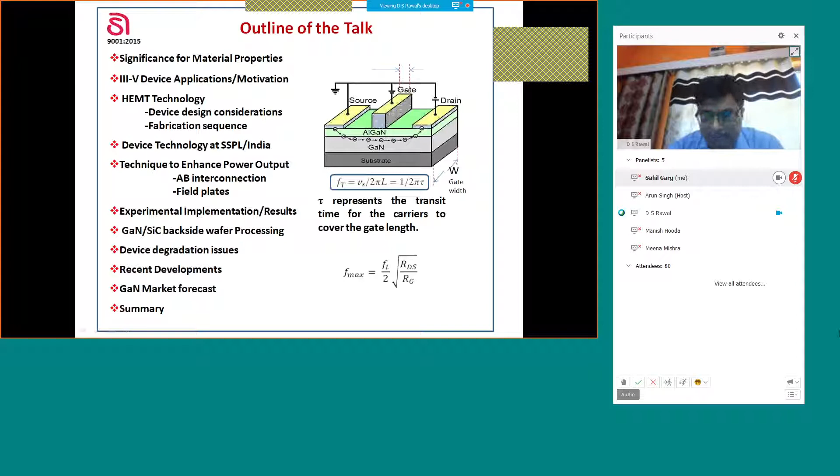If you consider semiconductors, silicon is the most important semiconductor of the 20th century. But there are still many things which cannot be achieved by silicon, like light emitting diodes, IR detectors, ultraviolet detectors, and very high speed electronics. High frequency or high speed performance is based on certain electronic transport properties which are not suitable in silicon for high frequency performance. Similarly, high temperature electronics or cryogenic electronics. So all these important application aspects are possible because of compound semiconductors.

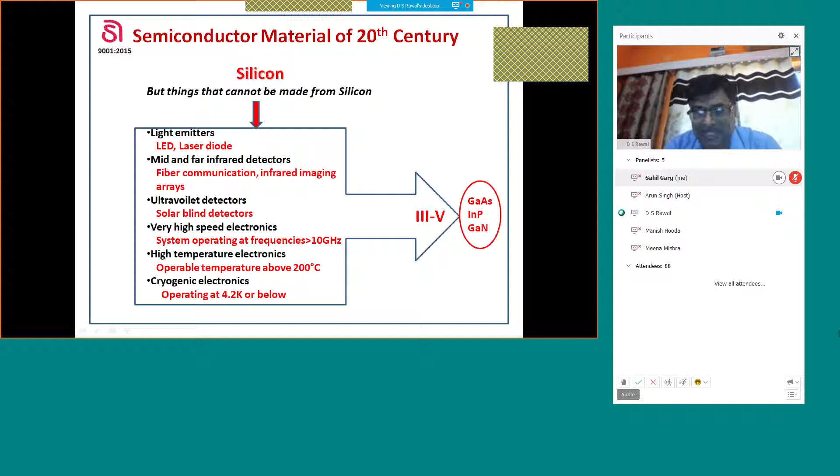The most widely used compound semiconductors are gallium arsenide, indium phosphide, and gallium nitride. Depending on the requirement of power and frequency performance, the particular semiconductor is chosen and worked upon. These days, because of very high frequency and high power requirements in various applications, gallium nitride is taking over most of the strategic and critical applications.

If you consider the three generations of semiconductors mainly based on silicon, gallium arsenide, and gallium nitride, you can see that gallium nitride wins over all three generations because of the obvious better material properties. You can see that the band gap is 3.4 electron volts, which gives flexibility of applying very high voltages, since high electric field strength is there.

This is the only wide bandgap semiconductor material system which exists in heterostructure with a two-dimensional electron gas in the quantum well, with a very high sheet carrier density, which gives us very high current. Then the other very important parameter for high frequency performance is the saturation velocity, which is very high. And another important parameter is mobility.

On the first day, Professor Dipankar Saha categorically mentioned that high frequency performance is mainly because of the high saturation velocity. Normally people give a lot of value to high mobility. High mobility is important, but it helps us in reducing excess resistances and increasing current density. So although high mobility is very important, for high frequency, saturation velocity is more important. But mobility reduces excess resistances, source resistance, drain resistance, and in a way also enhances frequency performance.

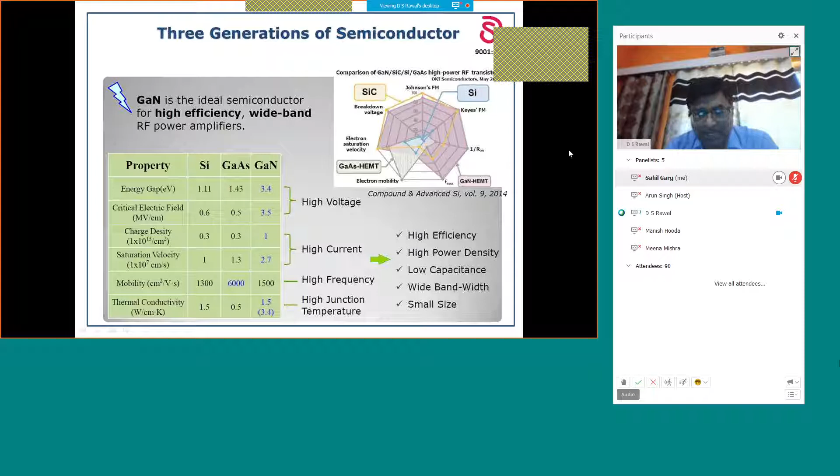I'll not be discussing this in detail, just to tell you that the best frequency performance is still possible using indium phosphide HEMTs, and the cutoff frequencies, or the maximum frequency reported, Fmax, is of the order of terahertz. Whereas if we need high power at high frequency, then the gallium nitride HEMT is the best candidate.

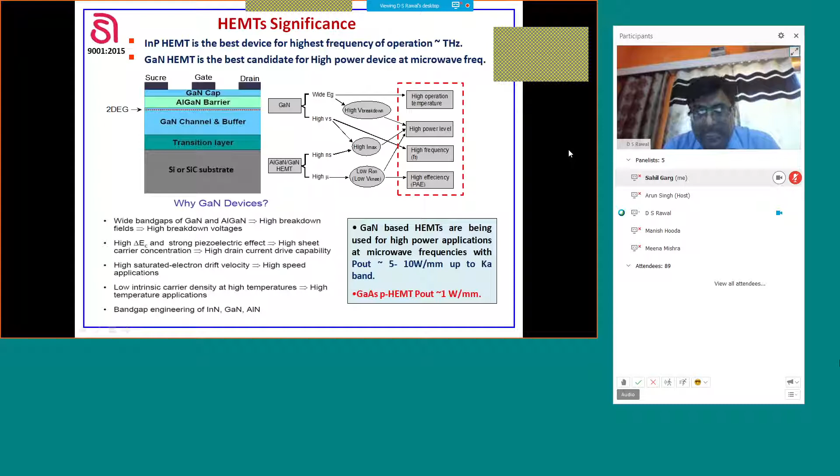For comparison, gallium nitride HEMTs give power density of the order of 5 to 10 watts per mm up to Ka-band, whereas in gallium arsenide pHEMT or indium phosphide pHEMT, the power density is restricted to 1 watt per mm. So when we are talking of systems with very high power density, one has to go to gallium nitride based systems. And since the density is very high, we get a lot of advantages in size and weight considerations, which are very important for airborne applications.

Another important aspect of this gallium nitride technology is that major microwave applications can be divided into two categories: one is below 3 gigahertz and above 3 gigahertz. Below 3 gigahertz, many competing technologies are there: silicon carbide MESFET, silicon, gallium arsenide HBT, gallium arsenide HEMT. But above 3 gigahertz, very limited technologies are meeting the requirement.

Above all, the beauty of gallium nitride technology is that it is covering the entire frequency spectrum, and most suitable for high power, high frequency applications.

Another important aspect is, if you consider a transmit-receive module, which is the heart of any communication system, three important amplifier or MMIC circuits can be replaced by a single MMIC circuit, called TR chip. This power amplifier, low noise amplifier, and switch, if we talk about gallium arsenide technology, can be separate chips using a lot of space, and there are losses of integration, and it requires a limiter also, which hampers the low noise performance.

So all these 3 or 4 chips can be replaced by just a single chip because of the availability of gallium nitride based MMICs. This gives us a lot of size, weight, and power performance enhancement, and is suitable for all airborne radar systems used for strategic applications.

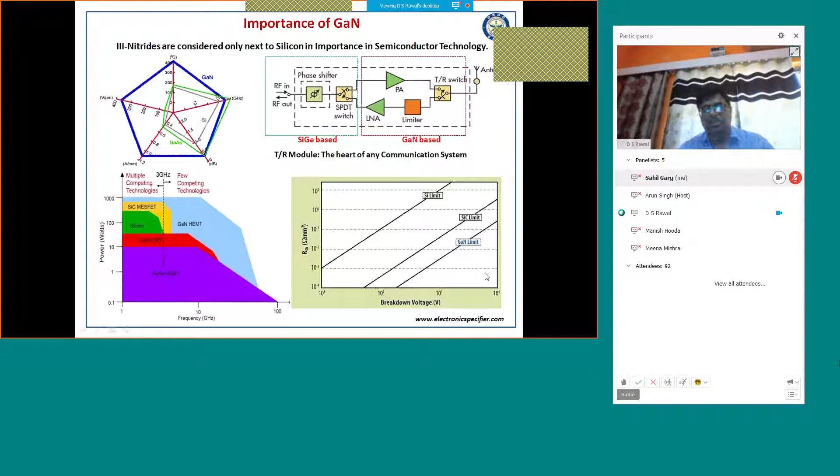The demand from future warfare systems is mainly based on SWaP-C. SWaP-C means size, weight, and power. We want smaller sizes, smaller weight, and high power. And C is again cost. Cost becomes very important when we are competing with commercial applications.

If you see the GaN material properties or GaN based system devices, they are most suitable for these kinds of applications. Major applications where these devices are being used are AESA radar, which is a phased array radar, then electronic warfare systems, communication links, satellite communication, then 5G, 6G are coming in a big way, and they are big users of this gallium nitride technology. Then software defined radio, anti-drone radars, all these are mainly using gallium nitride based systems because of obvious advantages of size, weight, power.

You can see that this phased array radar has no antenna mechanical movement. We can steer the beam by just changing the phase using phase shifters, and the beam is scanned. Because of the high power density, these radars can be mounted in fighter aircraft itself, and all fighter aircraft like Tejas or Rafale are using these phased array radars.

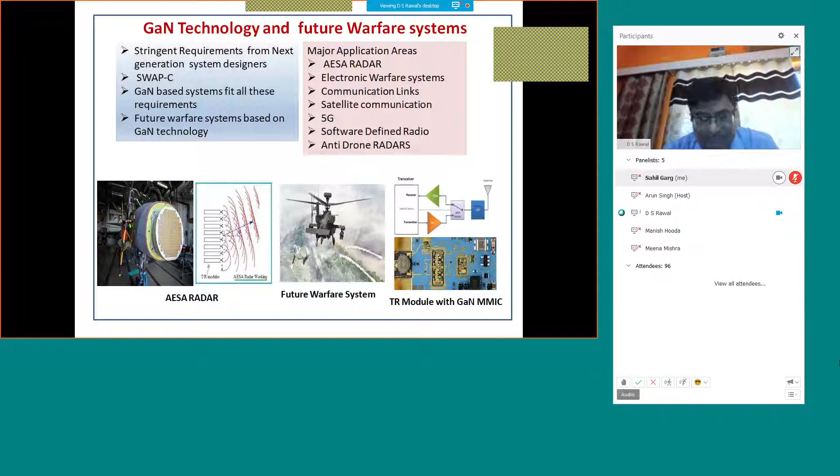If you see the GaN R&D initiatives in India, considering the importance, many academic institutes are working on this technology, mainly on device development. For HEMT technology development, IISc Bangalore, IIT Kanpur, IIT Delhi, IIT Madras, TIFR, Delhi University, PEC Chandigarh, SCL/ISRO, and IIT Roorkee are working, but their main area of work is mainly the HEMT device.

At SSPL, we are working on MMIC technology development. MMIC is microwave monolithic integrated circuits. So basically, the majority of usable products are in the form of integrated circuits - MMICs in the form of low noise amplifier, power amplifier, or switch.

On the first day, Professor Dipankar Saha also mentioned about MMICs, and they are working on the gate length of 0.1 micron. At SSPL, presently we are working on 3 frequency bands, that is C band, X band, and KU band, and the gate lengths we are working on mainly are 0.7 micron, 0.25 micron, and 0.15 micron.

The majority of products which will be used are based on MMIC technology. If you look at international standards, in 2019 only this 0.15 micron technology was available for commercial use, but even that is limited depending on your end user certificate and other factors, because this technology will not be available for strategic system development. So we have to have our own technology for self-reliance.

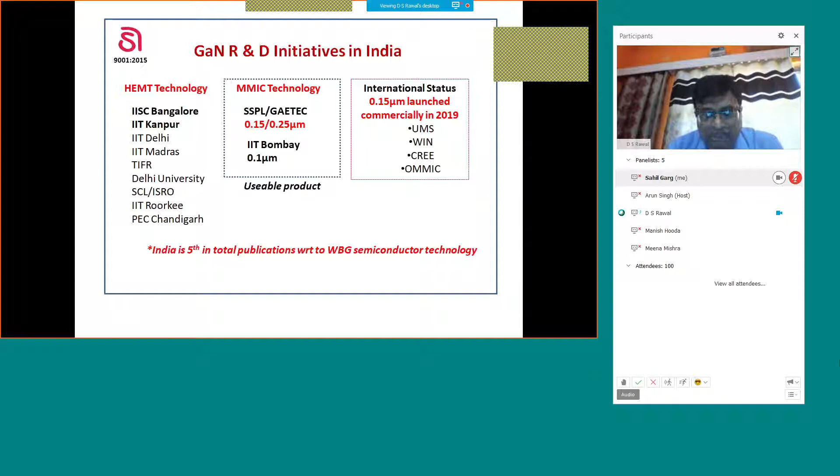Because of this, the government is now also seriously thinking of setting up a GaN fab for development of these MMICs, and a lot of work is going on. So we hope to get our own MMIC technology in the near future.

Looking at GaN technology at SSPL, basically for any GaN device technology, you have to have 4 big building blocks: your own process technology, material development, then design and modeling, and measurement.

If you look at any technology advancement, say silicon, the majority of technology advancement has taken place because of process innovations. But looking at compound semiconductor technology, most of the technological advancements have taken place because of material innovation. So for these RF applications, material is one of the very important things, and therefore process technology as well as material development become very important if you want to have your indigenous technology. Device, design, modeling, and measurement capability are also important.

At SSPL, we have mainly worked on RF electronics, and that too for radar applications for phased array radar and electronic warfare systems.

We have our own material growth facility based on MOCVD and MBE, and we have our own device fabrication sequence with the basic unit processes of contact formation, MESA isolation, gate formation, and passivation, as discussed in detail by Professor Dipankar Saha.

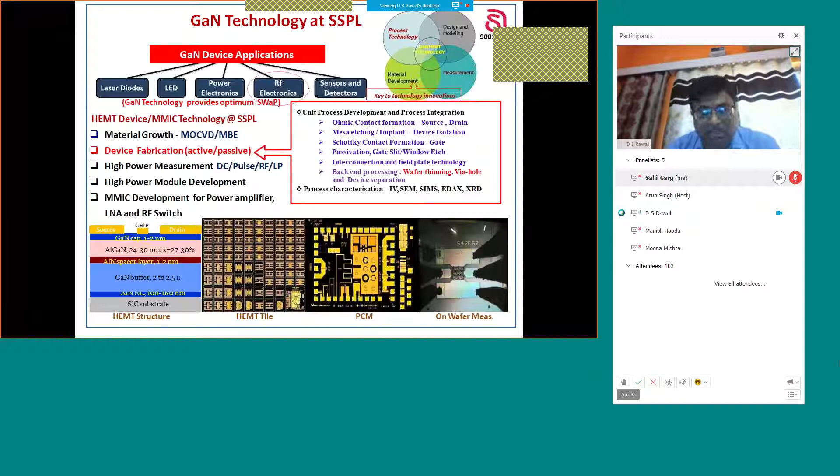And once you have your own active device, you have to have your own passive device with their models, and then these models are used for designing MMICs, which are the actual products used in these defense applications which I have just discussed.

So the first important thing is your own material. The HEMT structure is very important, and it is a heterostructure between two different band gap materials. One is GaN, another is AlGaN, and the 2DEG density, as discussed by Professor Dipankar, depends on the thickness of your barrier layer, that is the wide band gap material, aluminum gallium nitride.

Depending on the requirement, we have to fix the thickness of our barrier layer, and aluminum concentration also decides the band gap, which then gives the conduction band discontinuity, very important for confinement of the carriers. So to have high sheet carrier density in the quantum well, we have to have high thickness as well as high aluminum concentration.

But high thickness or high aluminum concentration have other consequences, so we have to have a compromise. We just cannot increase thickness or aluminum concentration, because the growth issues become difficult, and we have to have a very good interface quality, and dislocation density should be very low.

Then good 2DEG characteristics mean very high sheet carrier density and very high mobility. Since these are very strained layers, there are chances that the wafer may curve or get a bow. This bow should be minimum, because when we fabricate these devices, we are using contact lithography, so we need a perfect contact with the mask.

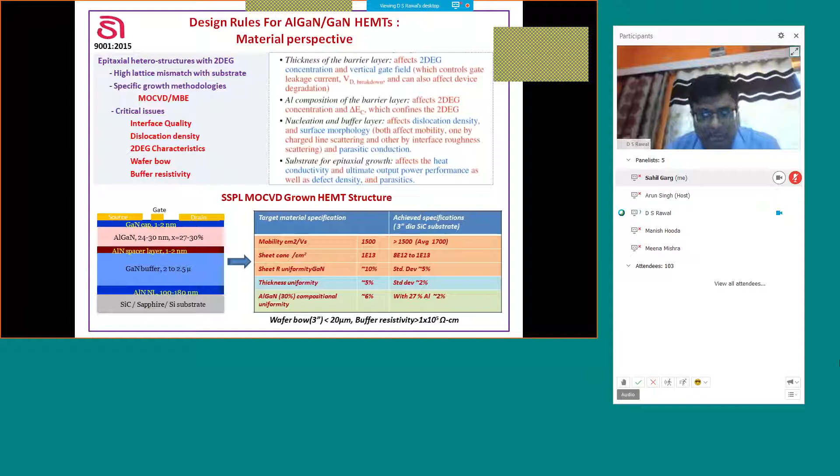continuous high mobility of more than 2000 centimeter square per volt per second with an NS of 1 to 1.5 E13. And the bow of the wafers of 3-inch size, we have controlled to less than 20 micron, which is as good as available in the commercial market.

The present status of growth is that we presently have a 3-inch growth technology, and our indigenous material has delivered devices with 4.5 watt per mm at 28 volt up to C band, and the plan is to upgrade now the wafer growth to 4-inch. Presently we are using buffer resistivity with carbon doping or dislocation by introducing dislocations, but the best results obtained or reported are with iron doping buffer.

So we are now in the process of installing one new MOCVD with this iron dope capability. The system has already arrived in SSPL and is under installation, and we hope to get, by end of this year, our own HEMT structures with the iron dope buffer.

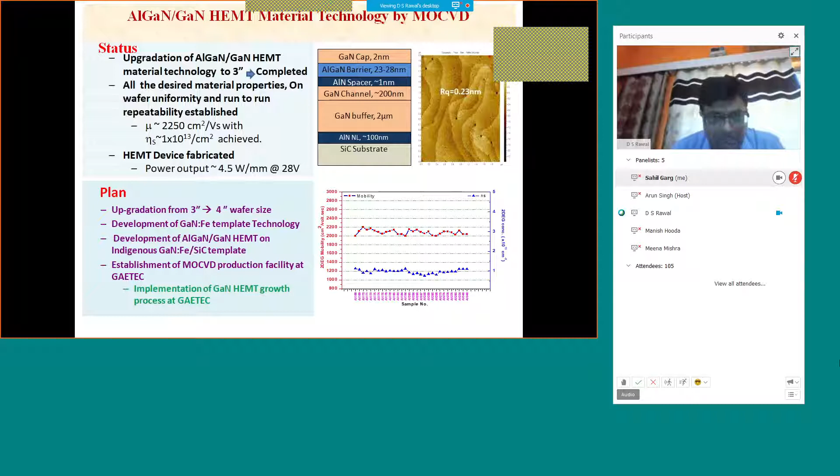Considering device considerations, the HEMT basic device design depends on your requirement of frequency and power density. We cannot take random parameters or geometrical parameters. Unit gate width is a function of power gain, so if I want to have a very high power gain at a high frequency, I have to have a controlled size of the device based on HFSS simulation.

You can see that if my size increases enormously, more than lambda by 16, then distributive effects come into play, and a lot of parasitics come in, and my performance will be degraded. So depending on the frequency requirement, we have to decide the design of our device, which includes unit gate width, gate length, gate to gate spacing, number of gates. We just cannot keep on increasing the number of these parameters just to have best performance.

That will not come because it is a function of the frequency. You can see that this graph tells you that with frequency, the power gain is reducing for a particular unit gate width. So for X band, I cannot have unit gate width more than 125 or 100 micron. But for my HEMT, I can have 300 or 500 micron at S band, because power gain reduction is not more than 2 dB at S band for that unit gate width.

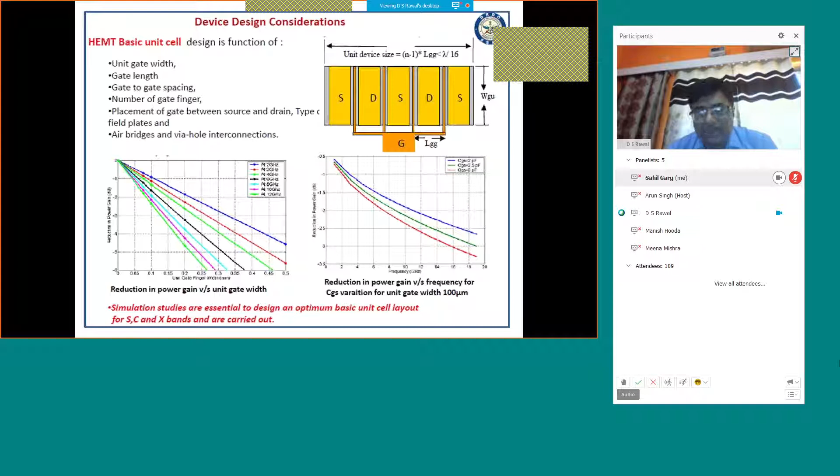Since very high current densities are involved, a lot of heat is generated, so we have to control the channel temperature of these devices also. That channel temperature is a function of gate width, gate length, substrate thickness, and substrate thermal conductivity. This channel temperature governs the design of your cooling system or package once these devices are used in actual systems.

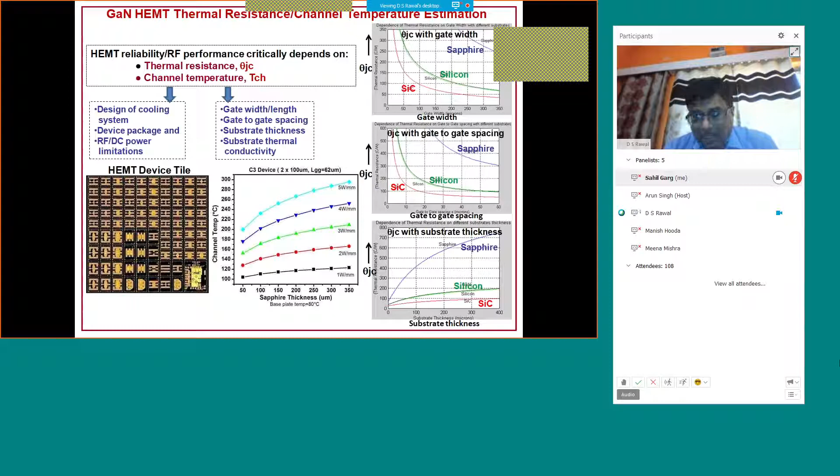This graph shows how the channel temperature varies with the kind of substrate. You can see channel temperature is minimum for the silicon carbide substrate because of its very high thermal conductivity. That is why silicon carbide substrate is most preferred for high power applications, because it can dissipate very high power at a very fast rate, and we can have high channel current devices delivering very high power densities.

At our place, we are basically working on two different processes. One is totally based on optical lithography, where my gate length is of the order of 0.7 micron, catering to C-band processes. The other process uses electron beam lithography, where my gate length is 0.3, 0.25, and 0.15 micron, for development of X band and KU band devices. The complete process is a 12 to 13 mask process with dry etching, metal deposition, gold electroplating, silicon nitride deposition for passivation, DC and RF testing, and backside processing.

Normally in backside processing, lapping is the technique used, but since a lot of strain is involved in my HEMT structure, and I don't have the flexibility to change that strain—because it decides the sheet carrier density and affects the current output of the device—I don't want to disturb the strain condition of the heterostructure. So grinding is the preferred technique to reduce the thickness once fabrication is complete on the front side of the wafer.

Since silicon carbide substrate is involved, once we completely fabricate the devices we need to separate them by cutting or dicing them. Special dicing techniques are used to separate these devices, because we have to dice the silicon carbide. All these processes are now available at our place, and we are regularly using them for the fabrication of devices up to X band.

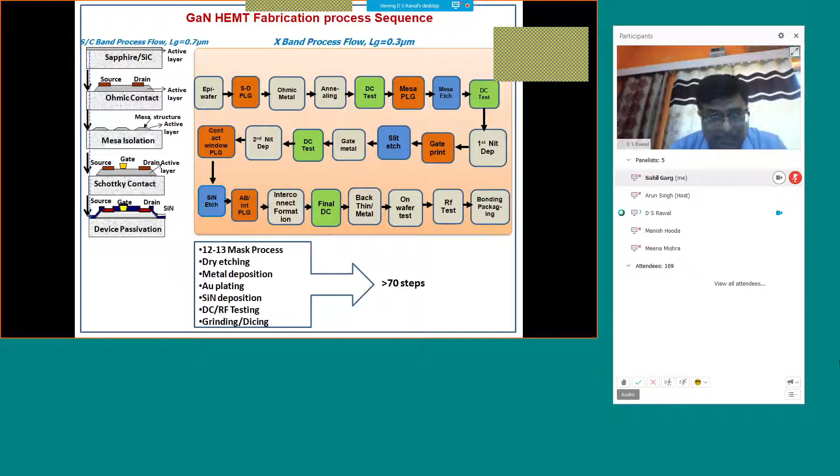I'll just briefly discuss FT analysis, because going to high frequency, it is considered that only reduction of gate length is sufficient, but reduction of gate length is not the sufficient condition to achieve the high frequency performance required for these strategic defense applications.

If you see, the cutoff frequency is normally based on this formula, and cutoff frequency is defined as the frequency at which the current gain is unity. It is mainly a function of gate source capacitance, source resistance, and drain resistance, but this cutoff frequency is not only a function of gate transit time, it is also a function of the parasitic capacitance or parasitic delay involved in transport of electrons from source to drain.

So mainly it is three components. One is called intrinsic delay, which is mainly reduced by reducing the gate length. Extrinsic delay is based on your gate architecture—how your gate geometry is, whether it is close to source or in the center of source and drain, or its shape, whether it's a mushroom gate or some other kind. Then parasitic delay depends on how good your contact resistances are; we need to have minimum source resistance or drain resistance.

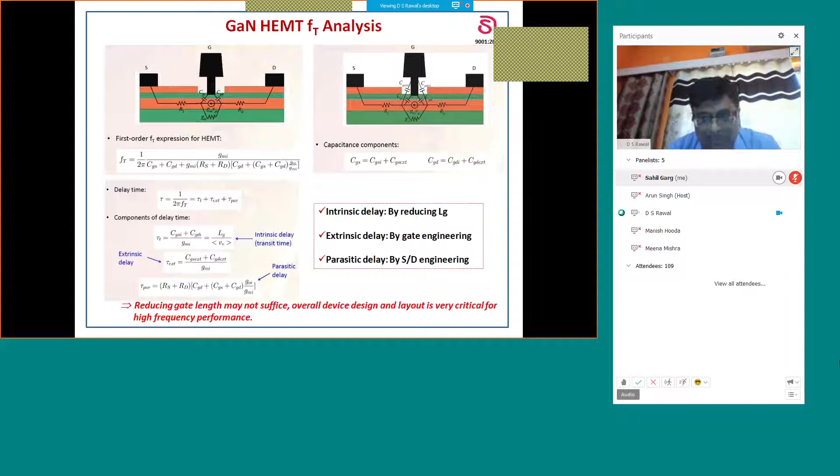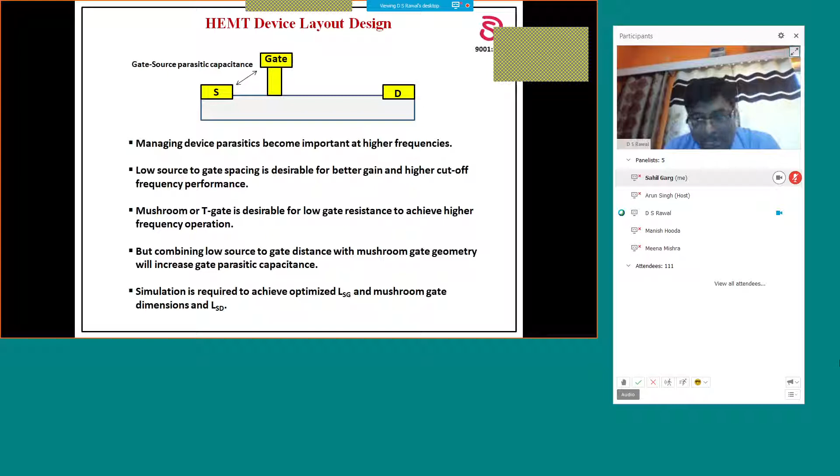Considering HEMT device layout design, we need to manage the parasitics at high frequencies. Low source-gate spacing is desirable for higher cutoff frequency. As we go higher in frequency, we need to reduce gate length as well as gate-to-source spacing. Mushroom or T-gate is desirable because it gives low gate resistance with high cutoff frequency. Simulation is very essential to have an optimized layout of the device before going for actual device development.

Source and drain are ohmic contacts, and gate is a Schottky contact, and these have already been discussed in great detail on the first day by Professor Dipankar Shah. I will not dwell much on these, but we also have an ohmic contact based on titanium aluminum nickel gold, and this is suitable for up to X band applications because the RC, or figure of merit, is of the order of 0.4 to 0.5 ohm mm.

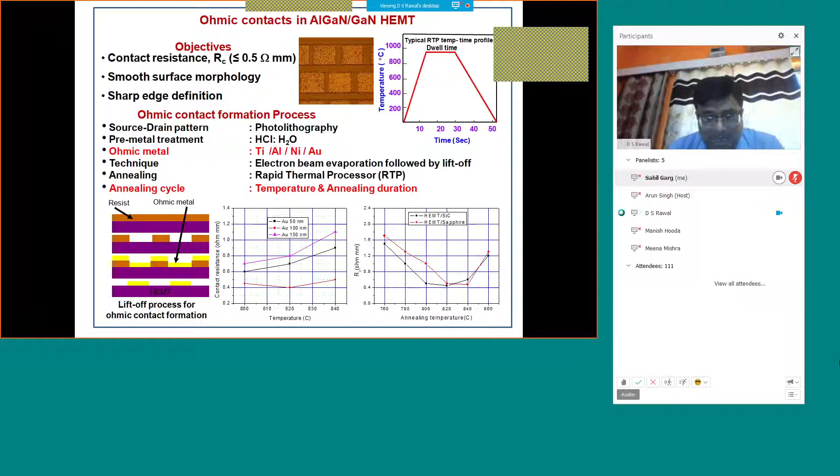But when we go to KU band frequencies, we need to reduce these RC contact resistances of source and drain, and the required order is less than 0.2 ohm mm.

This ohmic contact technology is not only a function of the metal stack or the temperature, because it is a long process sequence which involves an RTP heating cycle, how good your photolithography process is, what residues are left, and how clean the surface is where you are putting the metal.

We use an oxygen plasma cleaning step of a particular duration, then argon bombardment to increase the nitrogen deficiency, and then pre-metal treatment to remove oxides if there are any. So it is basically a combination of different processes for a single source-drain ohmic contact formation, and ultimately it leads to improvement of the figure of merit.

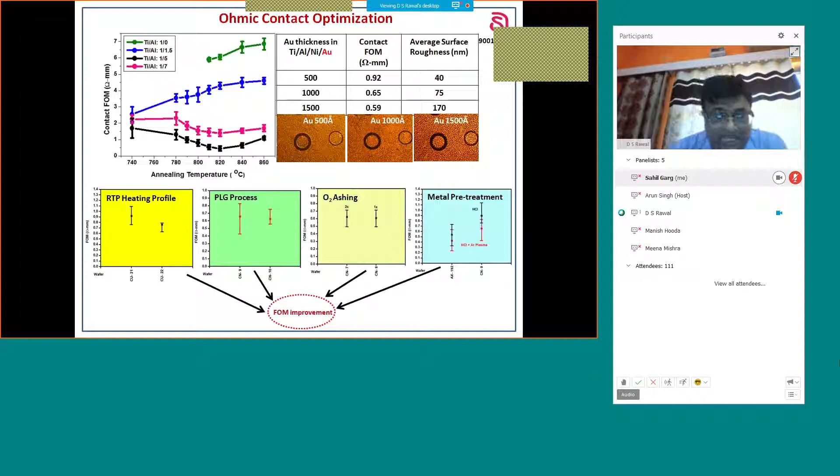Now we have a process based on gold, silicon, titanium, aluminum, nickel, gold, and we are achieving an FOM of the order of less than 0.2, suitable for KU band applications also.

At the same time, as discussed on the first day, other important parameters of the ohmic contact are smooth surface morphology and edge acuity, which are very important for going to smaller gate length devices. This new metal system gives us better surface morphology and better edge acuity, with RMS surface roughness of 80 angstrom, which is as good as reported anywhere in the world.

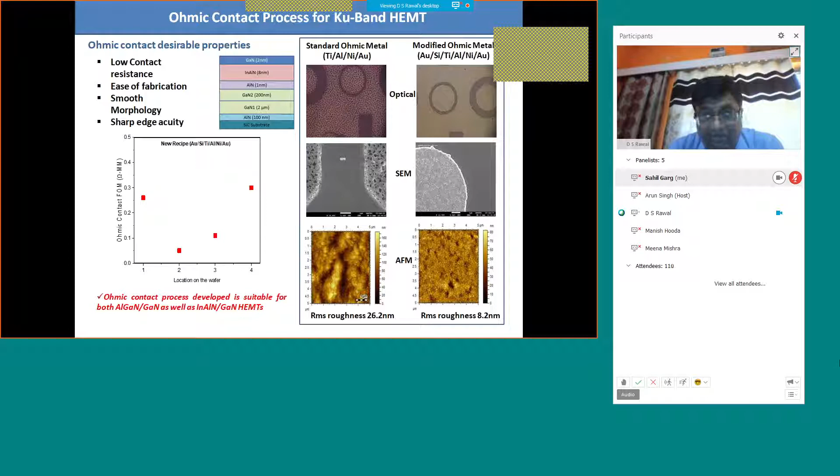And now we are implementing this ohmic process for fabrication of KU band devices.

Since all these devices are fabricated together on a single wafer, they have to be electrically isolated. Since gallium nitride involves very high bonding energy, no wet etching is possible. So the etching of unwanted material is done by dry etching, using chlorine-based reactive ion etching process.

You can see this is the cross section showing the active area, where these are called mesas, and actual HEMT structures are fabricated over these. So simultaneously I am fabricating several HEMT devices, and they have to be electrically isolated. So I am removing the conducting material in between, but in a controlled manner.

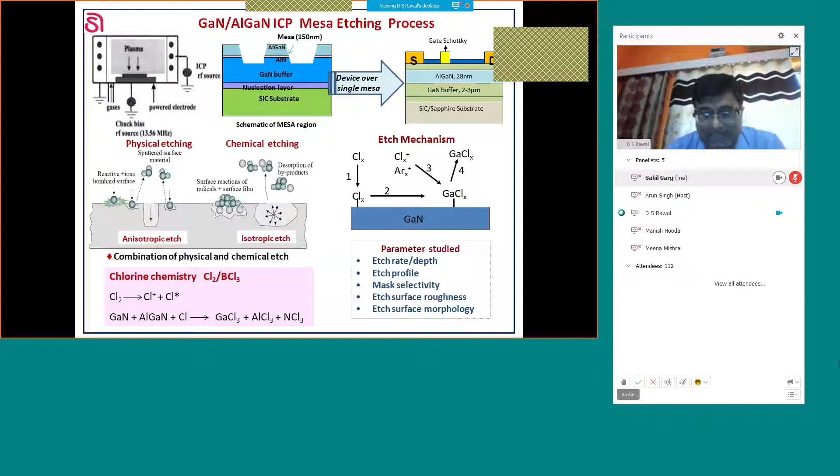This is done by chlorine-based plasma chemistry, and this process we have developed here, and we are now regularly using it for fabrication of devices.

You can see that this is the source, this is drain, and this is gate, and this gate pad is to be on the buffer, and this is the active region where my 2DEG is there. This cross section shows the actual mesa top where the device is fabricated, and this is the buffer where normally my passive component or gate pad is formed.

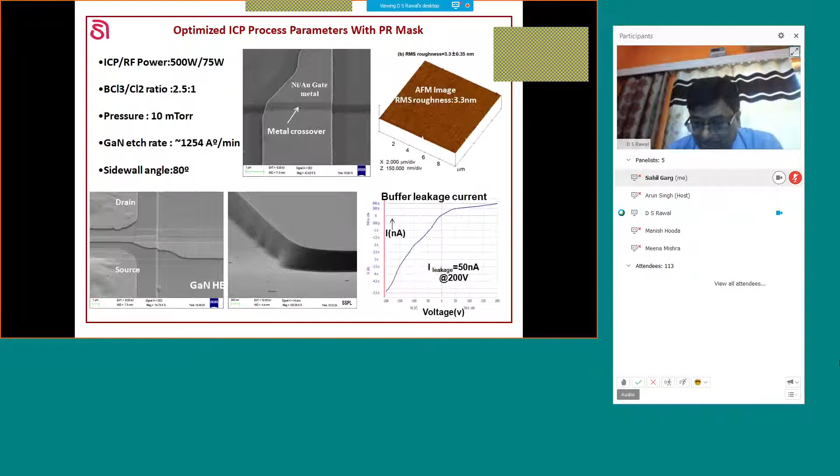This process is conventionally used for mesa isolation, but these days the preferred process is ion implantation because it gives flexibility of a planar process. This planar process is preferred for high frequency applications beyond X band or KU band.

Where you don't want implantation to take place, we cover that area with a mask using thick photoresist, and you have to choose your parameters such that after implantation you are able to remove that photoresist easily. Otherwise this becomes very hard because of high heat generation, and the process becomes very difficult.

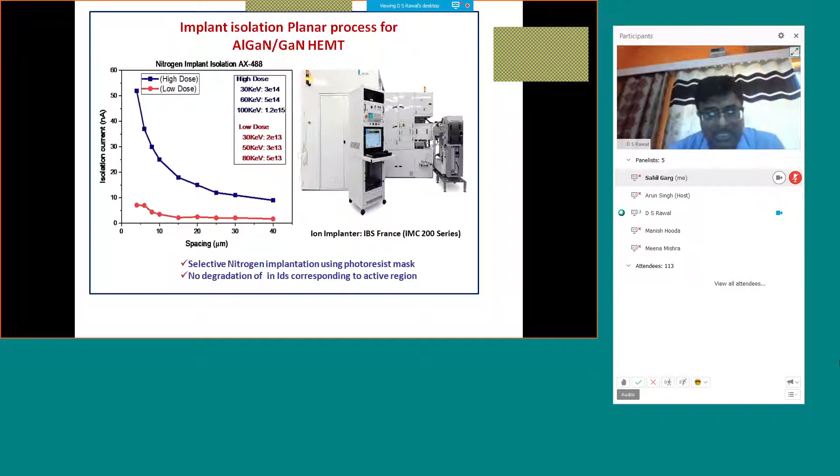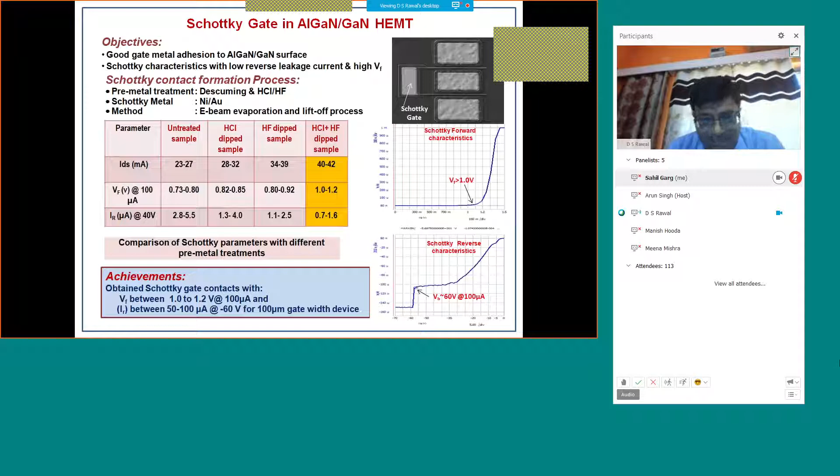So we have this process, and we have our own ion implanter at SSPL, and we are using this planar process for MESA isolation. We are using nickel Schottky gate, and the barrier height is of the order of 0.9 electron volt, with breakdown voltage of more than 150 volts.

Another important process, as discussed by Professor Dipankar Saha, is device passivation, because this gallium nitride material is a very, very defective material. So traps are there. These traps normally don't participate when we are doing DC characterization, but they come into picture during RF performance. So this trap characterization is normally carried out by pulse IV.

So you can see that this is my DC characteristic, but once I am using a pulse IV measurement, because of the presence of these traps, and these traps are trapping my carrier electrons, current reduces drastically in pulse IV or RF mode of operation. So we will not ultimately get the power.

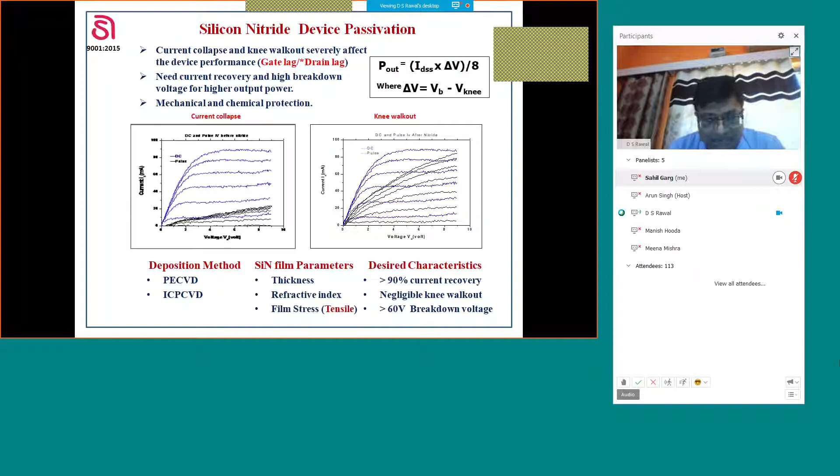So these traps are to be passivated by this silicon nitride device passivation, and this is normally done by plasma enhanced chemical vapor deposition or inductively coupled plasma chemical vapor deposition process, and these traps are passivated.

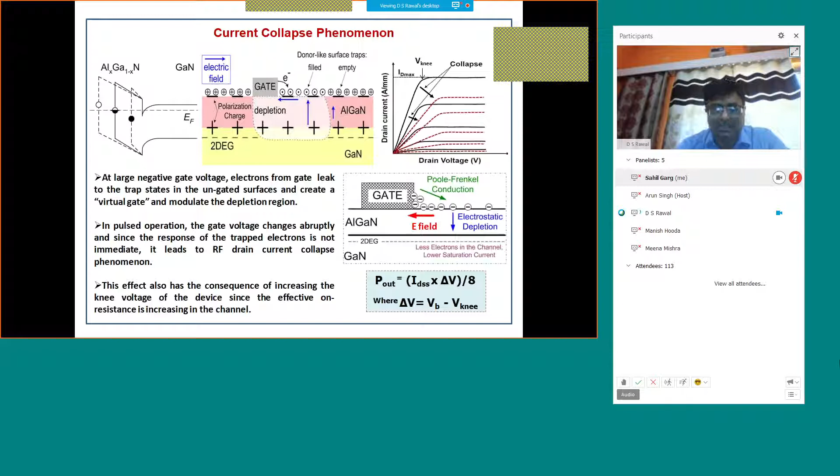And you can see that this is a virtual gate formation process, which I think is explained by Professor Dipankar Saha, so I will not go into detail, but the basic idea is to maintain the charge state of the aluminum gallium nitride layer's initial charge state, because during reverse bias, when we apply negative voltage at the gate, electrons leak through the gate and basically compensate the positive charge at the surface, and hence deplete the 2DEG.

Which ultimately results in reduction in the current or two-dimensional electron density, which reduces current and increases resistance, and this results in current collapse, which is basically reduction in current and increase in resistance, and ultimately the power performance is degraded. So this is normally taken care of by the passivation process, and this is how we have optimized our passivation process.

And this silicon nitride passivation is normally used in tensile strain, so that this tensile strain adds up in the piezoelectric polarization and increases the 2DEG to some extent. Therefore, after passivation, some increase in current and GM of the device performance is normally seen.

But there is a slight reduction in breakdown voltage also. So you have to have optimization of these parameters to have good current recovery, or minimum current collapse, with high breakdown voltage and good current density.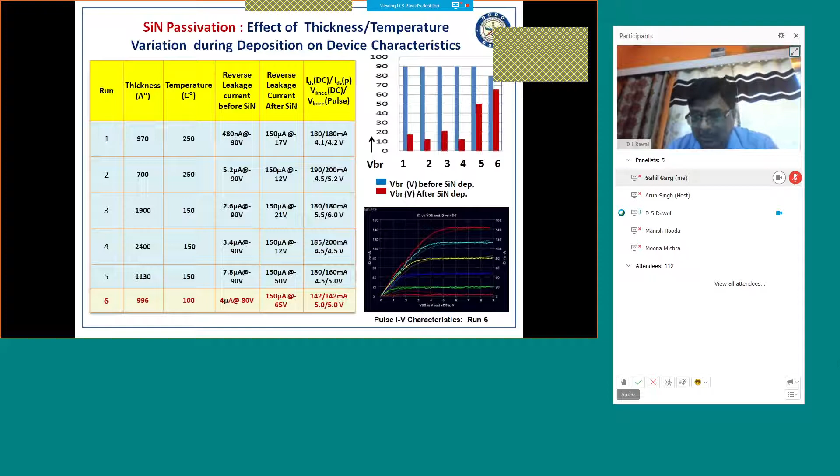And these traps are basically because of your defects. They may be point defects, they may be aluminum gallium nitride related defects, or they may be surface defects or surface traps. So depending on their location, they are affecting my device performance.

So if these traps are at the surface, then they result in the gate lag. That is called gate lag, because my gate voltage is not able to introduce the fast variation in my source drain current. So these are mainly taken care of by passivation.

But if these traps are present under the gate or in the bulk material, then they cannot be taken care of by this passivation. Then they can only be improved by improved growth techniques.

And one quick way of studying the presence of these traps is the CV analysis. So when we do capacitance voltage analysis at variable frequencies, you can see the CV curve behavior depends on these traps, because they respond to a particular frequency because of their fixed time constant.

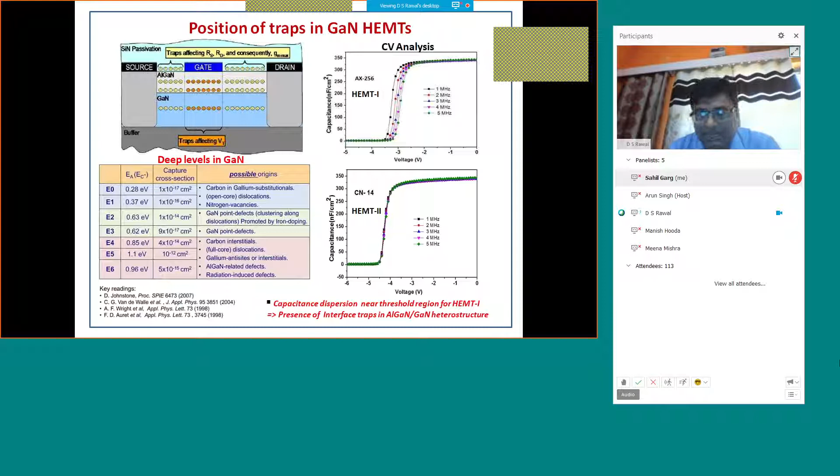And another important technology, because we have to have very high current handling devices, is that in these devices we have multiple fingers, so all those fingers need to be connected with low parasitic interconnection.

Air bridge is one of the low parasitic interconnections. At the same time, it gives you very good dimensional control with thick metal thickness that increases its current handling capability. So we have better dimensional control with high current handling capability and low parasitics.

So you can see that this is basically an air bridge. The metal is lifted from here and it is now in air, connecting this. This metal crossover is mainly separated by air, and air is the dielectric which has the lowest dielectric constant, so the metal overlay parasitic capacitance is minimum for this kind of interconnection.

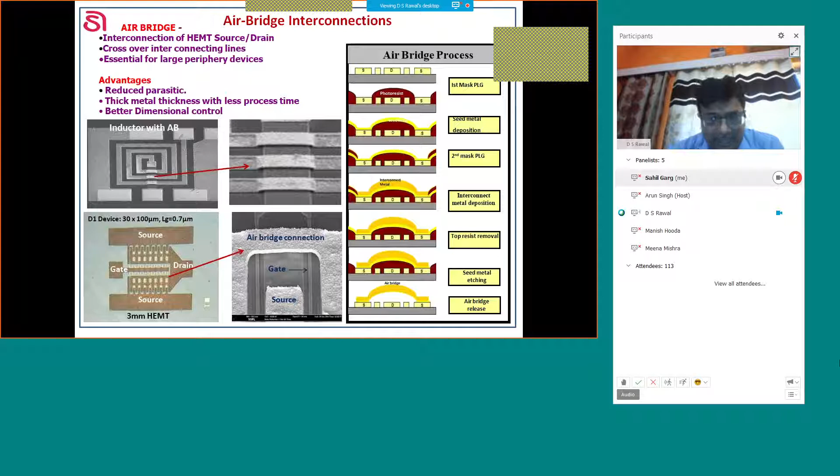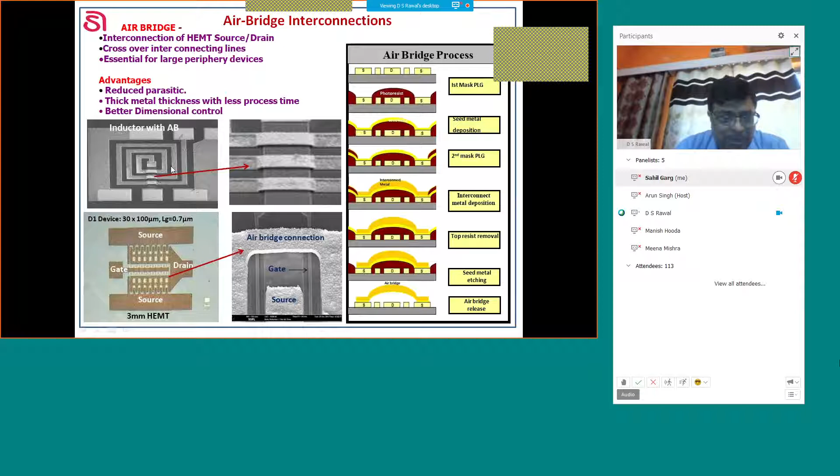This is mainly used for connecting multi-finger gates, multi-finger sources, or multi-finger drains in large periphery devices, or in spiral inductors, where this metal crossover parasitic becomes important at high frequencies.

Another important technology is on-wafer characterization. I will not dwell much on this; Dr. Meena will be discussing it, but it's very important because in RF technology development you need quick feedback. You need quick RF measurements at wafer level to improve upon your process. Otherwise, in RF technology, normally these devices are packaged and bonded before measurement, and that takes a lot of time. So CPW measurement capability is one of the very important aspects for quick technology development, which will be discussed in great detail by Dr. Meena in the next talk.

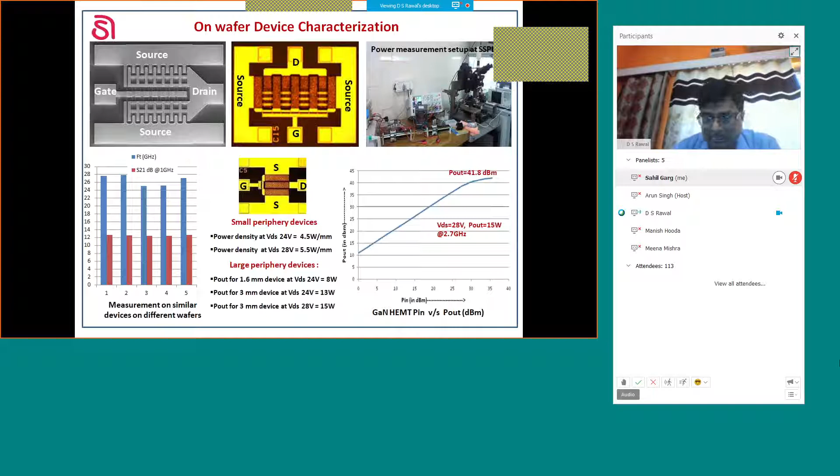Another important aspect I would like to discuss from our own experience is that just saying my material is good, measuring only sheet carrier density and mobility is not enough, because until the complete device is fabricated and characterized for RF performance, I cannot say that my material is good.

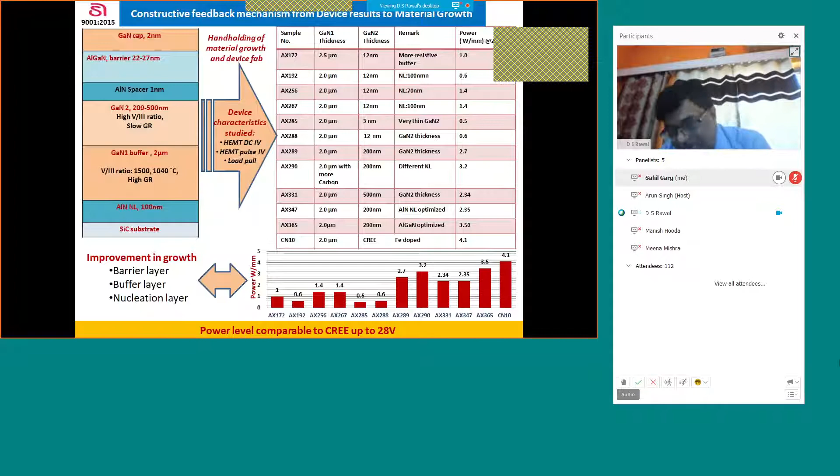Initially we worked with this kind of practice, but a lot of experimentation was carried out with not so good results. But once we started having discussions with our material growth team, there was continuous interaction between fabrication and growth teams, and based on the fabrication results we improved each individual layer, be it a barrier layer, a buffer layer, or a nucleation layer. Today we can say we are almost matching the commercial wafer power output of the order of 4 to 5 watts per mm, mainly because of the hand-holding between growth people and device people. So it's very important to work in a synergetic environment where both are discussing with constructive feedback for the improvement of the device. If you work in isolation, either material people or device people, it is very difficult to achieve the desired results.

Another important technology in use for these devices is field plate technology, because we operate these devices at very high source-drain voltages of the order of 28, 50, or 65 volts. These devices need very high breakdown voltage, and the thumb rule is that the breakdown voltage should be 3 times the operating voltage. So if I want to operate my device at 50 volts, it should have a breakdown voltage of more than 150 volts. Normally when we fabricate the device, the breakdown voltage between gate and drain depends on the electric field between gate and drain.

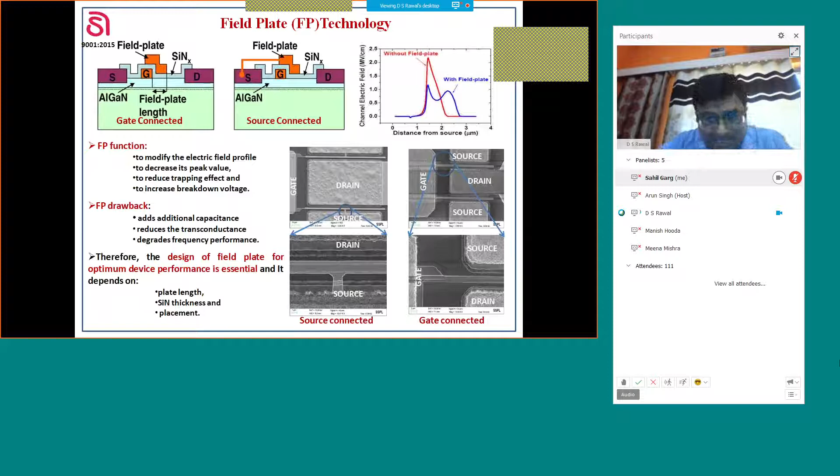This field plate reduces the peak of the electric field by redistributing the electric field in the gate and drain region. Atlas simulation is used for designing these field plates. As explained by Professor Dipankar, these are extensions of the gate fingers, and for our own devices we have designed these field plates as multi-finger field plates. You can connect this field plate to either the source or the gate.

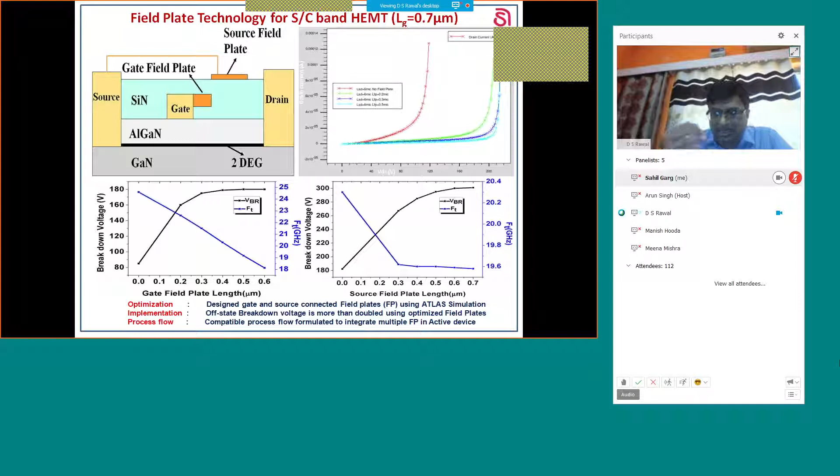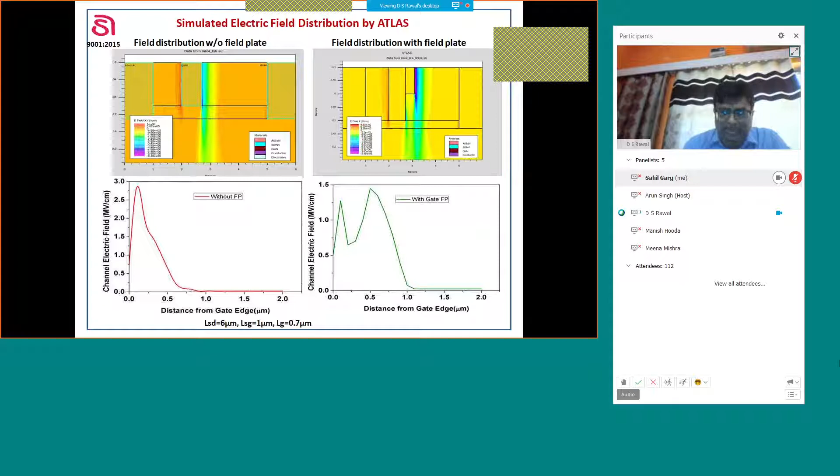Depending on the requirement, the device configuration is used. You can see that in a conventional device with no field plate, the electric field between gate and drain is of the order of 3 megavolts per centimeter. But when we put a gate field plate, the electric field peak reduces to 1.5, and if I use both field plates, gate connected as well as source connected, the field further reduces.

This enhances my breakdown voltage, and this is the actual measured result. Without a field plate, the breakdown voltage of a device is around 50 volts, but with the gate-connected field plate, it is around 90 to 100 volts, and with both gate-connected and source-connected field plates, it is more than 150 volts.

And now I am able to operate my device at 50 volt VDS, and the power output is of the order of 10 watt per mm. Although before, without field plate, it was 5 watt per mm. So that is how device capabilities are enhanced by using field plates or by reducing the peak of electric field.

Between gate and drain. But there is a disadvantage of these field plates also, because we are connecting them with the gate finger. There is an adverse effect of this, because it is increasing the gate capacitance. So your frequency performance is getting affected.

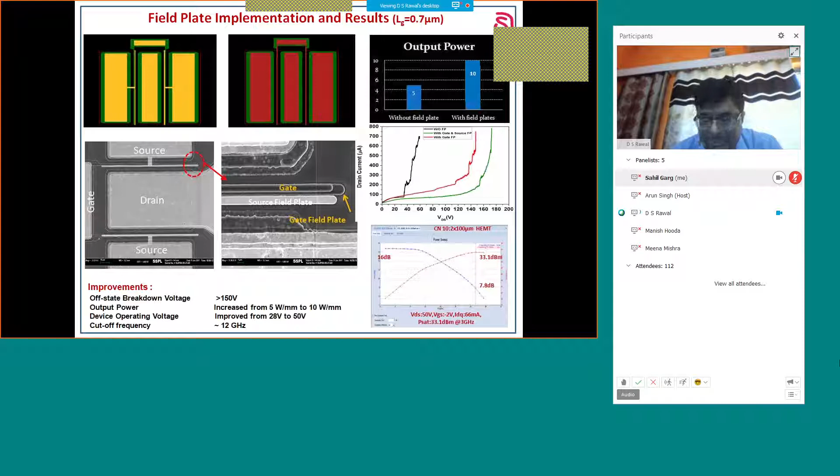So another important advantage of field plate is that it reduces the leakage current, which is again very important aspect for these gallium nitride devices. And lower leakages provide the higher gain.

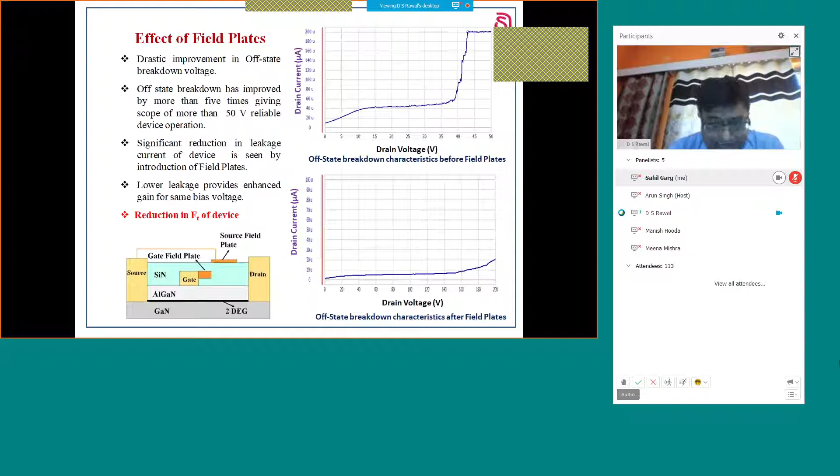But the disadvantage, as I told you, is that it increases the gate source capacitance, which reduces my cutoff frequency. So you can see that without field plate, my cutoff frequency of this 0.7 micron 2-finger device is around 17 gigahertz or 16 gigahertz. But with these two field plates, although I'm getting 10 watt per mm, my cutoff frequency is reduced to 12 gigahertz.

So there are ways to design your field plate so that there is minimum adverse effect on frequency performance. Normally source field plates are preferred because they affect less your frequency performance. So you can see that in this third device, we have now used only source finger field plates, and I am able to maintain my cutoff frequency to 16 gigahertz. So not much effect is there on FT with enhancement in breakdown voltage.

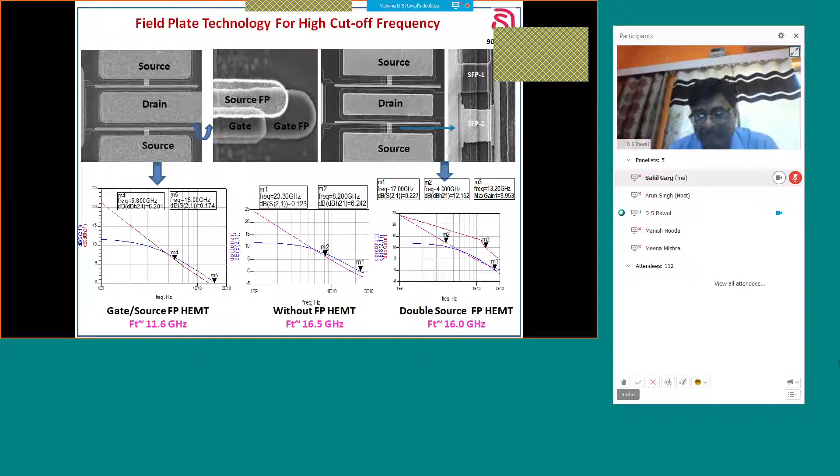So these kind of field plate structures are preferred for high frequency application. And this is the process normally we follow for X band or KU band devices, where, as I told you, we have to maintain the initial charge state of the GaN HEMT surface.

So this technique is basically based on early passivation. Once we fabricate source and drain contacts and do implant isolation or MESA isolation, then we passivate the complete surface of the wafer, and then by using electron beam lithography we open a small gate dimension, and then using dry etching etch this small slit, which basically decides my gate length.

And then in a second electron beam lithography I am defining the head of my gate. So my footprint is reducing the gate length, and this is important for high cutoff frequency, but I need low gate resistance also. So this broad head is increasing my area of gate, cross section of the gate, and reducing the overall gate resistance.

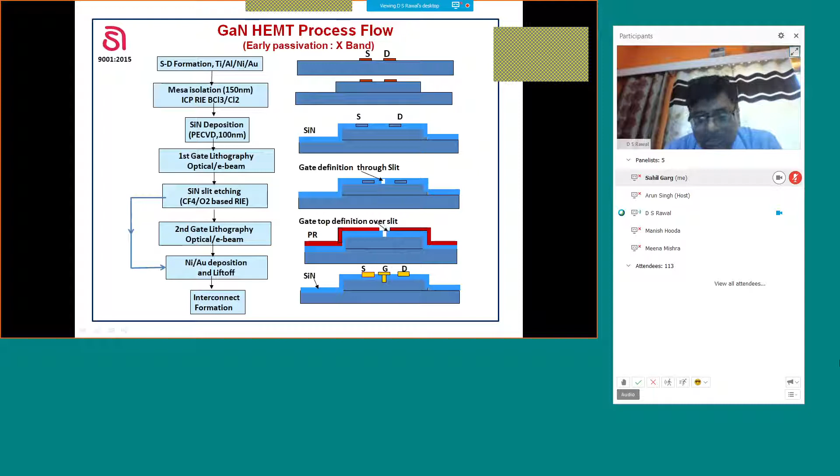So this technique is normally used, and you can see that this EBL, electron beam lithography, defines 0.25 micron gate dimension, and this is showing actual silicon nitride layer etched by dry etching in a controlled dimension. Again, this is 0.23 micron, and then this metal deposition is carried out, and this is how this T-gate looks like, because this dip in the center is basically the slit, which is the gate footprint.

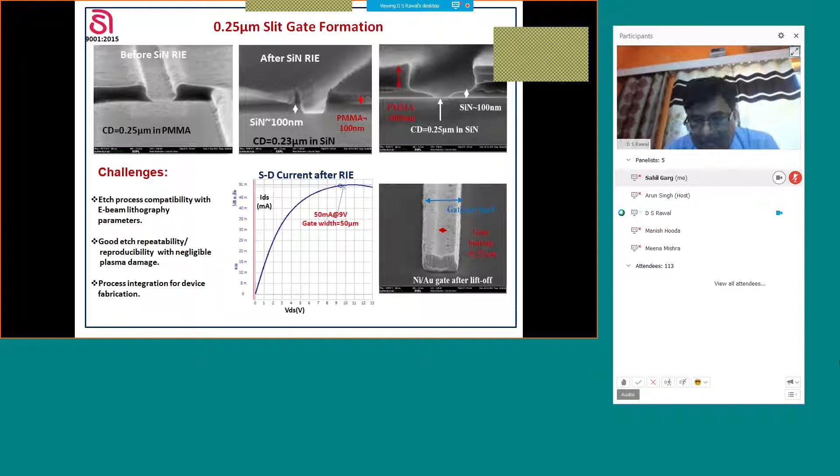So we have fabricated devices using this technique, and the cutoff frequency measured is of the order of 36 to 37 gigahertz with power output of 5 to 7 watt per mm. And now we are working on 0.15 micron devices. So again, the same process is used, but we have now defined this electron beam lithography dimension of 0.14 micron.

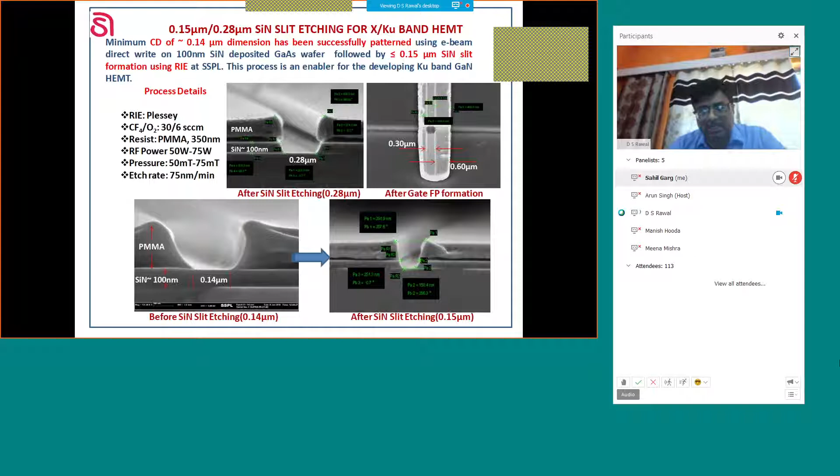And then through this 0.14 micron, we need to remove selectively silicon nitride, which has already been done. And then metallization is done. By this way, we are able to reduce my gate length to 0.15. And the expected cutoff frequency for this kind of gate structure is more than 35 gigahertz, which is suitable for KU band application. So now presently we are working on development of these devices.

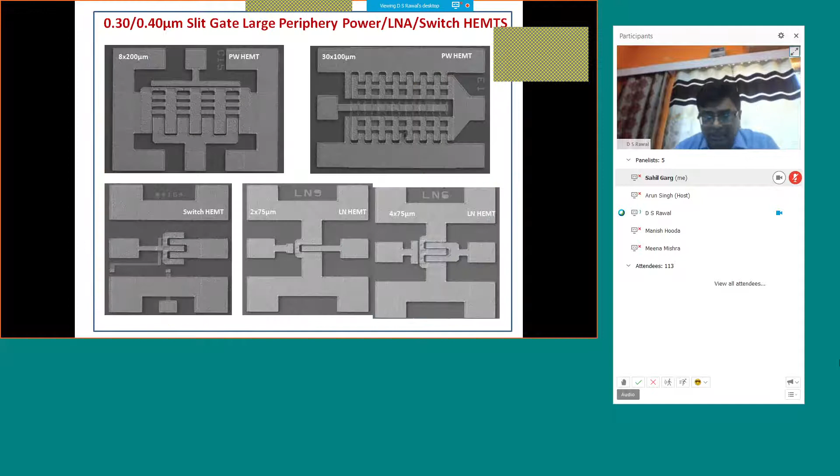And this is the devices which we have already fabricated. This is a 12 watt device, this is a 15 watt device, this is a 30 watt device. And these are multi-finger devices with maximum number of fingers of the order of 32. So you can see the complexity. Even if my one single gate finger is not working, my complete device will not work.

So we have now fabricated devices up to 12 mm of gate width, and we are working towards development of 130 watt single device output power. Presently we have designed the device, and it is now under fabrication. So this 12 mm or this 7.2 mm device is delivering power of 30 watt, indicating the good device design, because we are getting very good power scaling.

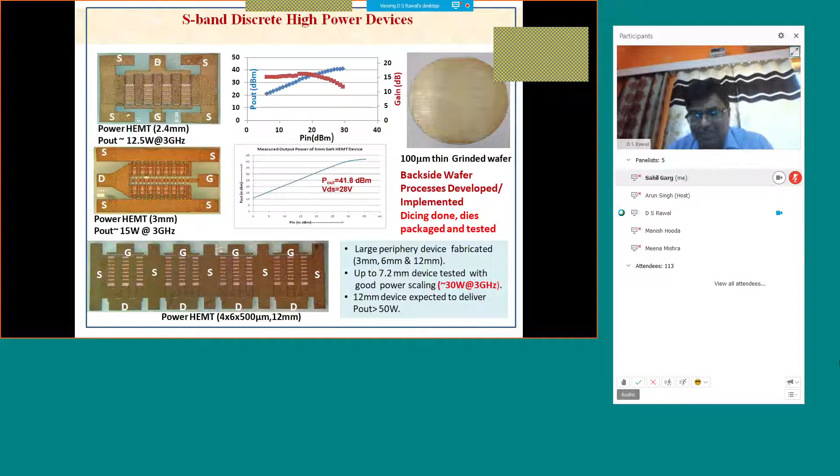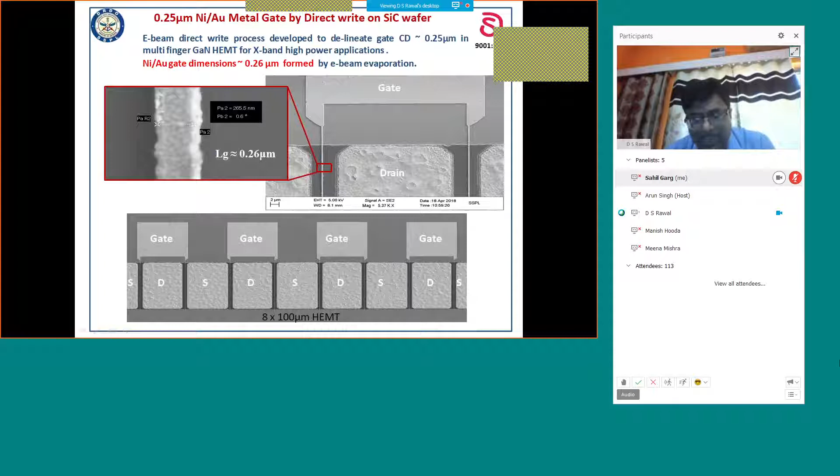Otherwise, normally what happens when you combine these smaller unit cells, if there is not good matching, there are chances that you may end up having very high losses, and your power output may not be as per requirement. These are X band devices, and you can see this is the slit, and these are the number of gates in a single device, varying from 8 to 30 to 40 fingers depending on your power output requirement.

Now coming to the backside process, since gallium nitride uses silicon carbide as a native substrate, once these devices are fabricated on the front side, the thickness of the wafer is reduced to 100 micron from an initial thickness of around 350 micron. To go for KU band or high frequencies, you need to reduce the thickness to minimize losses, so the standard thickness is around 100 micron, which we achieve by grinding process.

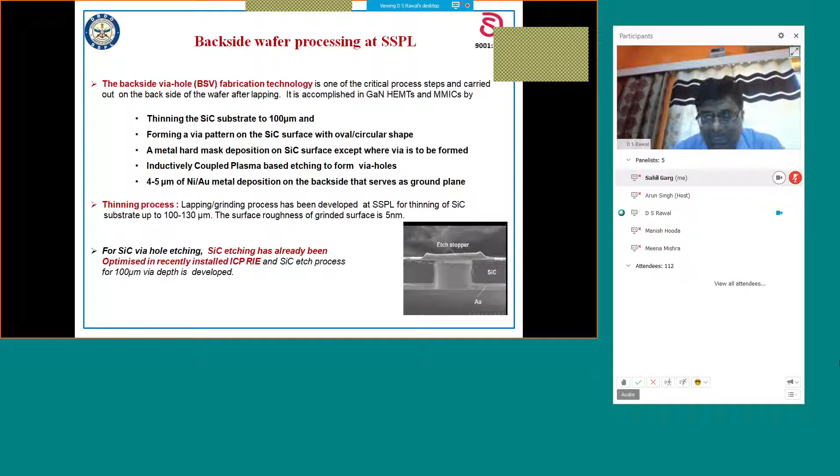And then we fabricate via holes. Via holes are the interconnections normally used to ground the source connections, since in these power amplifiers, devices are used in common source configuration, where source is required to be grounded. You can ground source either with a bond wire or with via hole techniques, but bond wire at high frequencies offers very high parasitic inductance, which hampers frequency performance. So normally,

since in these devices the backside is used as a ground plane, we need to connect the source pad to the backside ground plane. A hole is aligned at the back of the source, etching is carried out, and metal electroplating is done to connect the front side source pad to the backside ground plane. But since silicon carbide is involved, which is very difficult to etch, dry etching is normally used.

We have now this process, and you can see this is the multi-finger HEMT device where these are the source pads, and this is the backside of the same device. You can see these are the holes which are etched on the backside of these pads, and these source pads are now directly grounded, so we don't need to connect bond wires. This increases the frequency performance by reducing the source parasitic inductance.

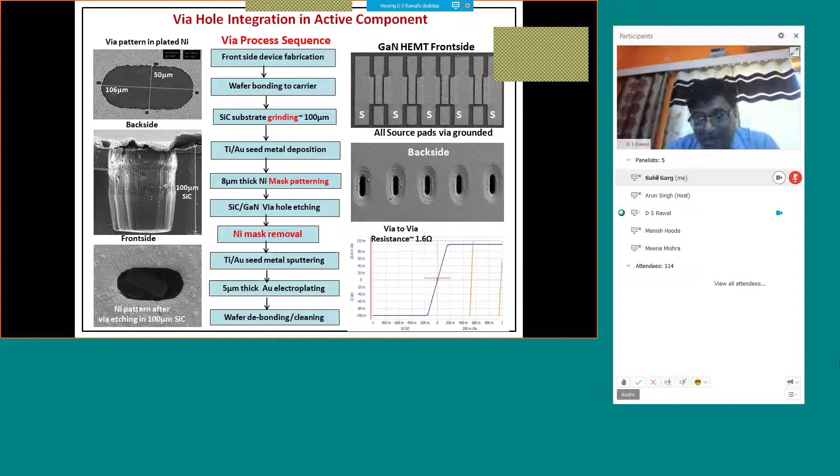So these techniques are very essential, like air bridge interconnection or via hole interconnection technique, to have good performance out of these high power, high frequency devices.

Another important requirement for MMIC development is passive components, because these integrated circuits use capacitors, inductors, resistors along with the HEMT devices. We have parallelly developed these devices, and now we have models up to 12 gigahertz. These models are then used for designing of MMICs, and are called process design kit or PDK. So we have to have a PDK of active device and a PDK of passive device. More details will be discussed by Meena ji, I think.

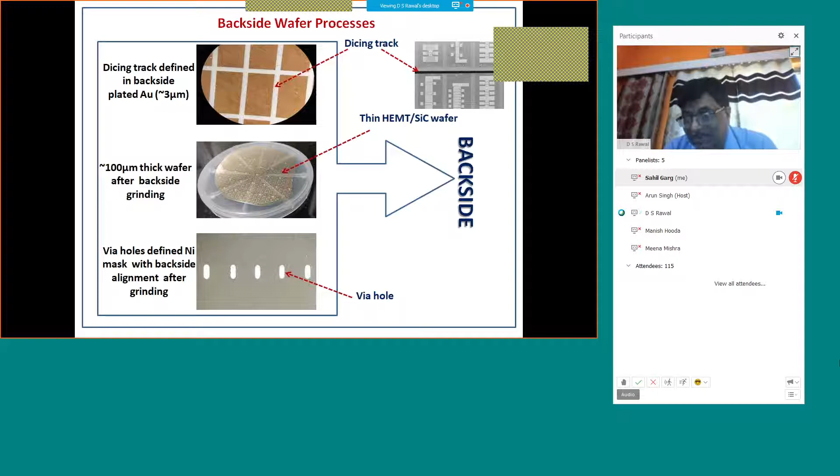So I'll quickly go through the backside process. Once we have fabricated the front side devices, there are a lot of backside processes carried out, involving grinding, via hole formation, and then dicing. Dicing is again very important, so diamond blades are used to dice silicon carbide, and the dicing process should be such that there is no degradation to device performance. All those processes have been optimized, and now regularly we are fabricating these devices.

But these devices are still suffering from a lot of degradation because very high electric field and high temperatures are involved. High electric fields are taken care of by introducing field plates, and high temperature, because of very high current density, is taken care of by the design of heat sink or by using a substrate with very high thermal conductivity.

What is normally done is, once the device is completely fabricated on silicon carbide substrate, the complete wafer is mounted on a carrier sacrificial wafer, and then silicon carbide is removed completely, and the thinned wafer is mounted on a diamond substrate, because diamond has the highest thermal conductivity, almost 4 times that of silicon carbide, and then this sacrificial carrier is removed. By this way, device performance has been reported to be enhanced by almost 3 times, and a lot of work is going on.

But again, silicon carbide and diamond are not cost effective solutions, so they are most preferred for strategic or defense applications where performance is the main criteria. But for commercial applications or 5G applications, a lot of research is going on for GaN devices on silicon substrate, because silicon substrate is cost effective.

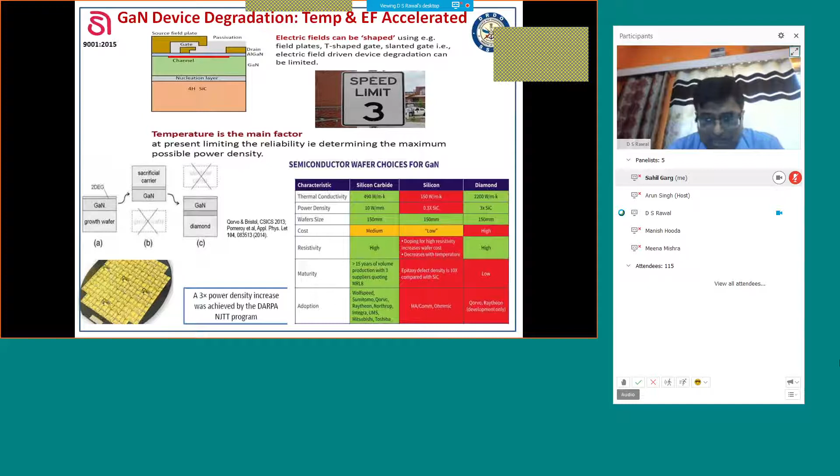It gives a cost effective solution. At the same time, silicon wafer size is almost up to 8 inch, 12 inch, whereas silicon carbide size is restricted so far to 6 inch, but people are gradually moving towards 8 inch. But the standard fabrication wafer size till 2-3 years back was 4 inch, but now most of the foundries are graduating to 6 inch.

Since gallium nitride, aluminum gallium nitride is a defective material and it is a polar material, it suffers from degradation because of polarization. So when we apply very high voltages, there are chances that it may introduce defects which can cause reliability issues. This is mainly because of lattice mismatch. These defects originate mainly because of excessive mechanical stress caused by application of high voltage. This is called the inverse piezoelectric effect.

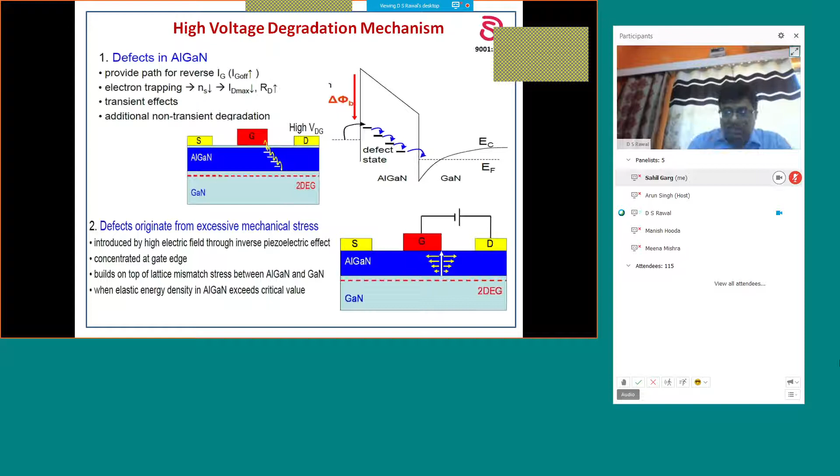So how to take care of this? Now people are going towards a new material system where aluminium indium nitride is used as a barrier layer, because aluminium indium nitride with 17% indium is perfectly lattice matched to gallium nitride. So there is no inverse piezoelectric effect.

At the same time, since there is no piezoelectric polarization, there are chances that sheet carrier density may get reduced, but it is not the case, because the difference in spontaneous polarization between aluminium indium nitride and gallium nitride is very high. That gives rise to very high sheet carrier density even with very thin aluminium indium nitride layers, which are very important and required for high FT or high GM devices.

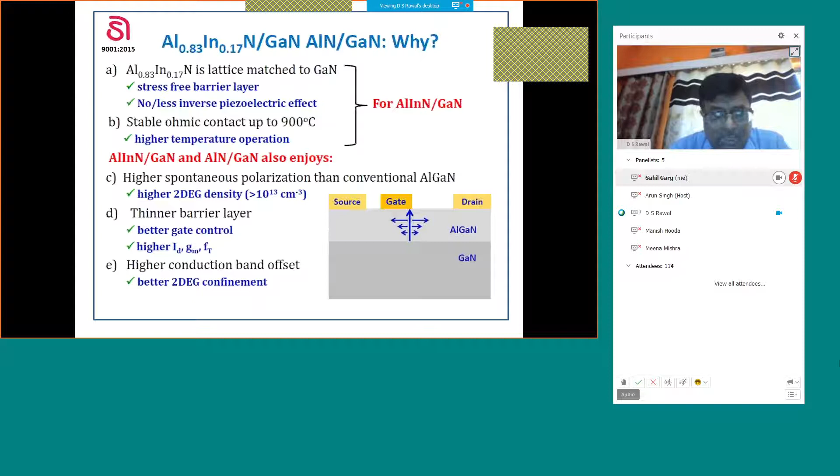So this aluminium indium nitride barrier layer over gallium nitride gives us two advantages. One is thin layers, important for very high frequency devices, and second, it is lattice matched, so there is no piezoelectric effect, less mechanical stress and fewer defects, so a more reliable device. You can see that indium aluminium nitride at 17% is lattice matched to gallium nitride.

Similarly, if we look at aluminium nitride in thin layers, the spontaneous polarization difference is even more. So if we grow a very thin aluminium nitride layer over gallium nitride, there may be slight strain, but because of the very high difference in spontaneous polarization, we get very high current density devices. These new generation devices are now being reported worldwide based on these two kinds of heterostructures, and people are going for aluminium indium nitride or aluminium nitride devices.

And then a new generation of devices is coming up, which is aluminium scandium nitride. Again, aluminium scandium nitride, because of very high spontaneous polarization, gives sheet carrier density of almost 3 times the conventional heterostructures, and therefore 3 ampere per mm IDS current density devices are being reported. So that is basically material engineering or heterostructure advancements.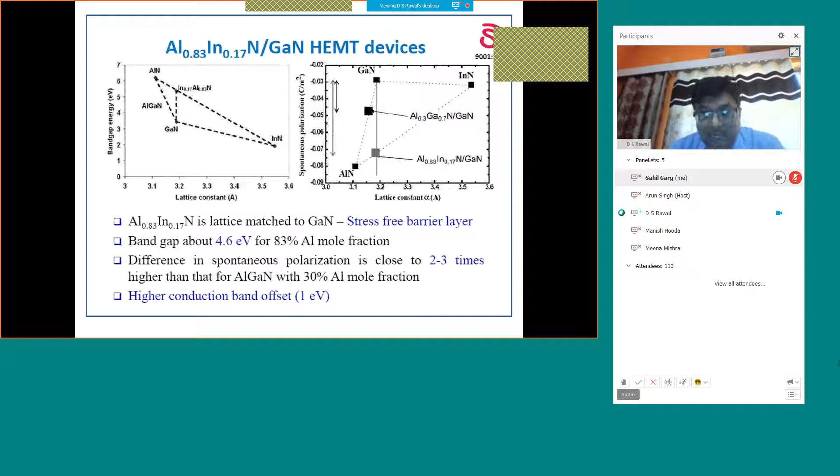You can see that in conventional heterostructure, we have 1.5 into 10 to the power 13 sheet carrier density per centimeter square, whereas in aluminium indium nitride, even with a very thin layer of 10 nanometer compared to 30 nanometer in conventional, my sheet carrier density is almost double. So I am getting very high current density at very thin layers, which gives me flexibility of very small pinch-off voltage.

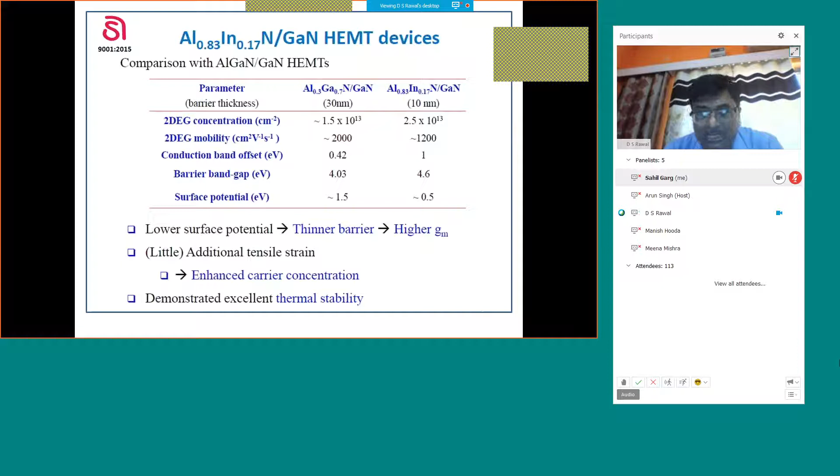These devices are resulting in very high transconductance, because a very small variation in gate voltage causes a large variation in drain current. These kinds of devices are preferred for high frequency applications, and you can see the GaN-HEMT capabilities already reported - the best GaN-HEMT is based on indium aluminum nitride, aluminum nitride, gallium nitride heterostructure with a gate length of 30 nanometer. This basically uses the advantage of high spontaneous polarization difference and smaller gate length, along with improved source drain contact technology.

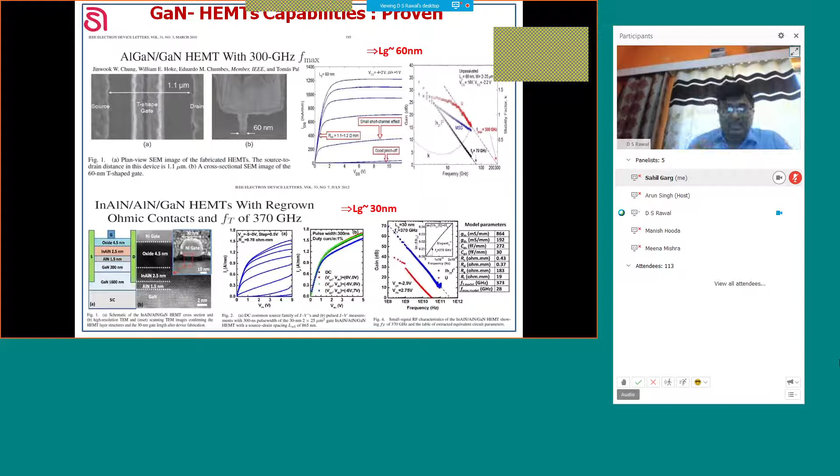So far the highest reported frequency for these gallium nitride HEMTs is based on aluminium nitride barrier layer over gallium nitride. On the first day, there was a question: are these devices suitable for terahertz applications? Yes, people are exploring these devices, and one such device has a gate length of the order of 20 nanometer, with a cutoff frequency reported of 454 gigahertz.

People are exploring these kinds of devices up to 0.3 to 0.4 terahertz for imaging applications, and these devices certainly have potential to go for 600 gigahertz or beyond. But so far, the best reported FT of the device, with 20 nanometer gate length using aluminium nitride, gallium nitride heterostructure, is 454 gigahertz.

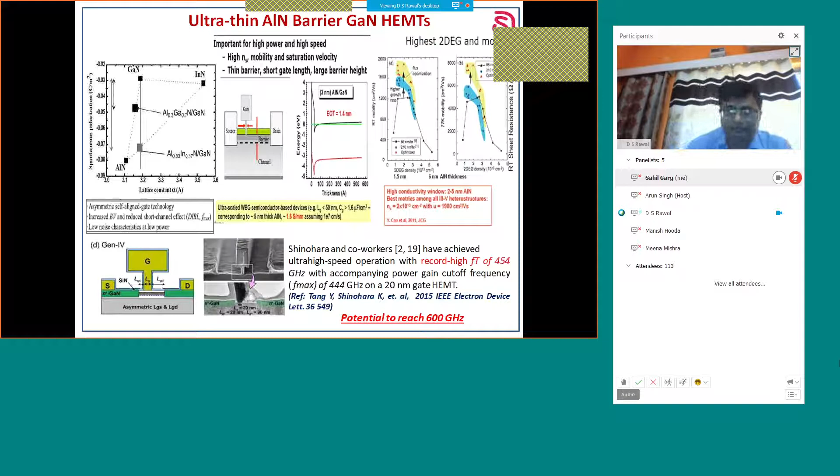A lot of advancement is going on to improve substrate properties, and people are exploring other substrates for growing these HEMT structures, zeroing in on aluminum nitride, because it is almost lattice matched to gallium nitride. So growth defects will be minimized, and aluminum nitride also has good thermal conductivity, although not equal to silicon carbide.

A recent report from this year shows Fujitsu has reported a 15 watt per mm device at X-band on aluminum nitride substrate.

Although substrate size so far developed is only 2 inch, a lot of research is going on, and in the near future we may see devices based on aluminum nitride substrate because of better grown layers with minimum defects. On silicon carbide, dislocation densities are of the order of 10 to the power 8 to 9 per centimeter square, mainly because of the lattice mismatch of 3 to 4%, whereas here the lattice mismatch is very, very less.

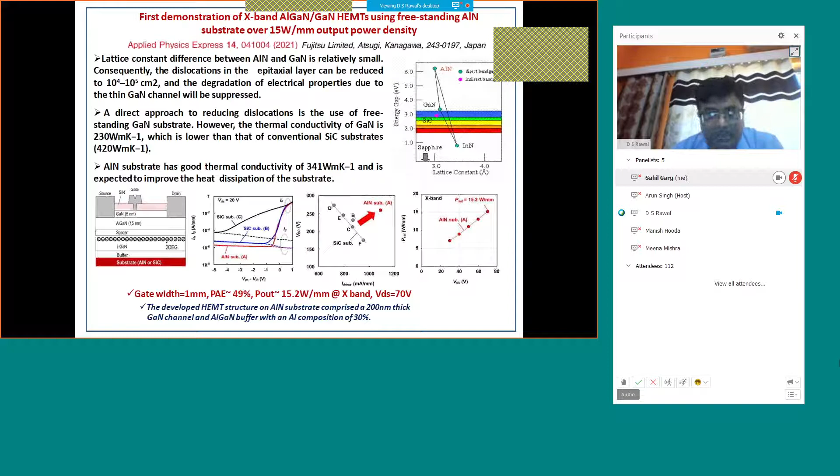If you look at the GaN RF market projections, the main technology drivers are high frequency, high power, and high linearity. All defense applications and satellite communication applications require high frequency and high power, so these devices are very much in demand for satellite communication or defense applications.

Where communication links are concerned, linearity is the prime requirement, and these devices are not that linear, so they are not very much in use for communication links. But in future, with advancement in technology, linearity improves, and GaN based HBTs come into the market. This technology is going to take over the complete RF market.

The projections so far with present technology, the 2019 report says the overall market is of the order of $700 million, and it is going to rise in 2024 to $2 billion.

And the main advanced utilization is in the field of wireless infrastructure because of 5G and military applications.

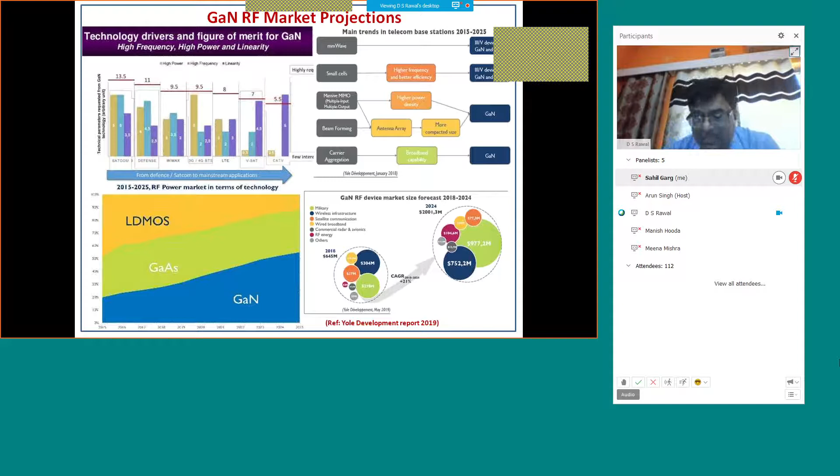Many foundries, for cost effective solutions, if you process a wafer, whether it is 4-inch or 6-inch, the processing cost is almost the same, but 4-inch and 6-inch yield almost gets doubled. So many foundries are now gradually moving towards 6-inch wafer technology: Sumitomo, NXP, Qorvo, Wolfspeed, OMMIC, BAE. These are all moving to 6-inch because of these requirements.

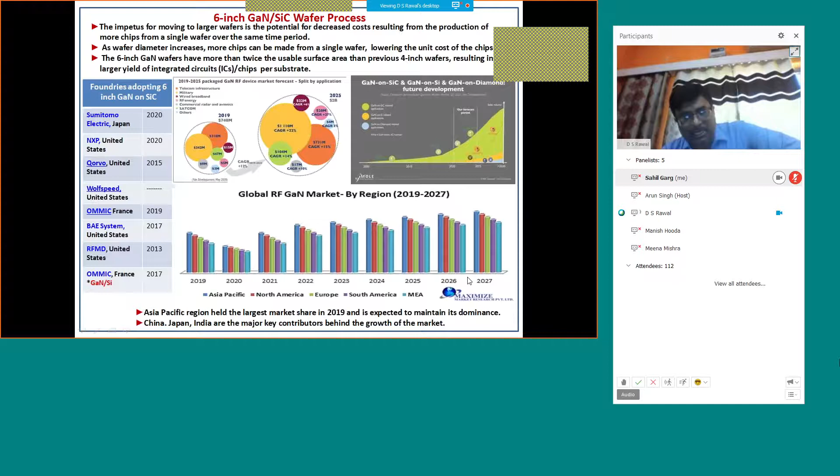demand for a cost effective solution with very good performance. This GaN on silicon carbide technology, the projections are such that up to 2030 they are in demand mainly for wireless infrastructure and defense applications. A lot of demand is there in the Asia Pacific region, mainly Japan and India. So for the next 10 to 15 years, there is a lot of requirement for GaN on silicon carbide devices for wireless infrastructure.